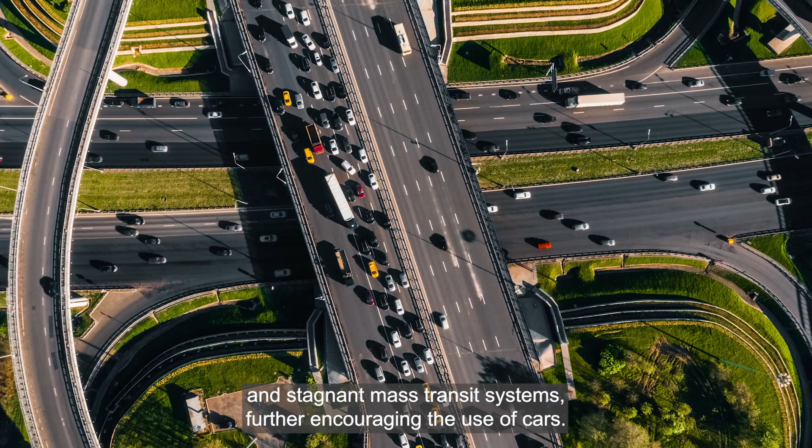Driving habits in the United States are constantly changing. Suburban sprawl boomed starting in the 1950s with the expansion of the U.S. interstate highway system and the effects of the GI Bill. Rates of private vehicle ownership rose sharply, with cheap gas and stagnant mass transit systems further encouraging the use of cars.

However, more recent expansion of mass transit systems, a clearer understanding of the environmental impacts of cars, and new alternatives to daily driving, such as rideshare apps, bicycle share companies, and the prevalence of remote work, has led Americans to slowly reduce their dependence on cars. This car dependence has influenced development policy over the decades, driving the construction of ever more elaborate parking systems.

Today, there are over 2 billion parking spaces in the United States, more than enough to cover the entire surface of Connecticut, an estimated 3 to 8 parking spaces for every car in the United States. A 2022 driving habits survey by U.S. News & World Report found that nearly half of all drivers have reduced the amount they drive compared with before the pandemic, and over 60% have reduced their driving because of higher gas prices.

The youngest generation of drivers is obtaining licenses at a slower rate than any generation before them, trading personal cars for metro passes and rideshare apps. Municipalities have noticed these shifts and responded by beginning to eliminate parking minimums for new development in transit-oriented communities. In 2017, the city of Buffalo, New York was the first in the United States to abandon parking minimums. Since then, other cities have followed their lead, from Santa Monica, California, to Hartford, Connecticut.

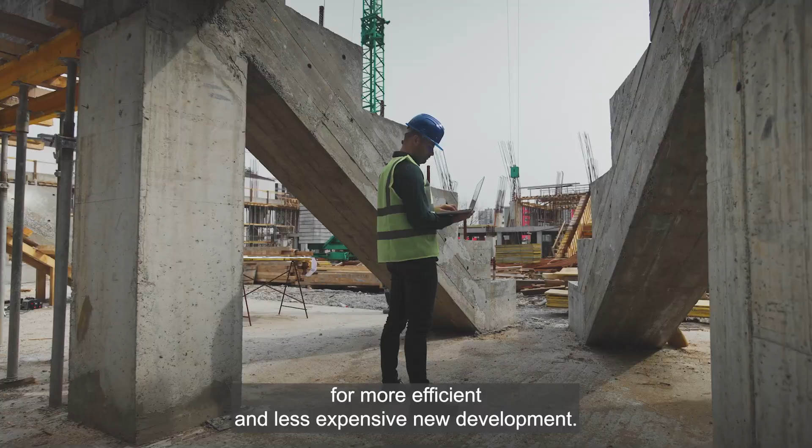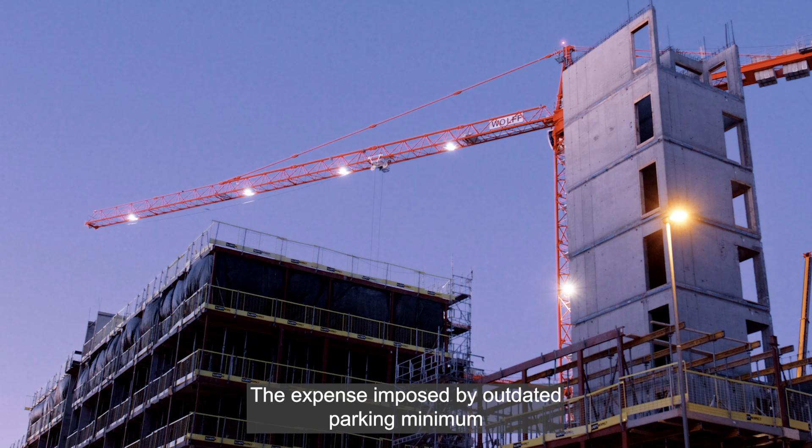These shifts in driving habits expose the latent possibility for more efficient and less expensive new development. According to construction engineering firm WGI, building a new parking structure costs nearly $28,000 per space. The expense imposed by outdated parking minimum requirements can severely hinder new residential development, further exacerbating ongoing housing shortages. Eliminating previously built parking structures will have its own negative impact. The waste generated by demolition, not to mention the environmental impact of new construction, makes adaptive reuse an attractive option.

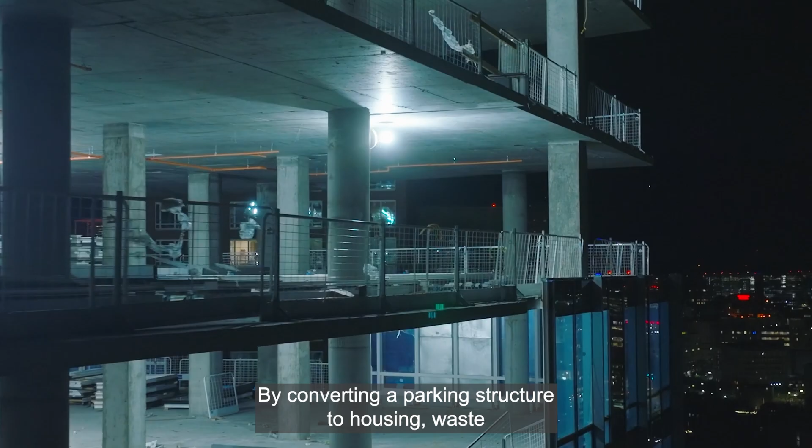By converting a parking structure to housing, waste is minimized and embodied carbon reduced. Starting with an existing structure and eliminating the demolition phase altogether also reduces the construction timeline. A few years ago, KTGY's Research and Development Studio proposed a design concept for repurposing underutilized parking structures for housing.

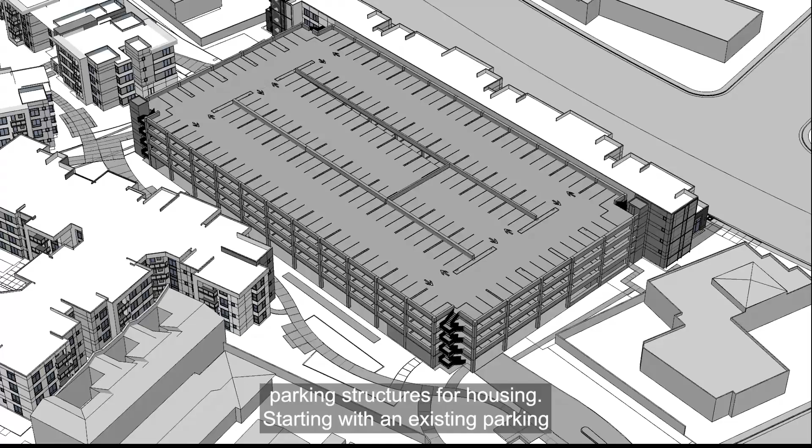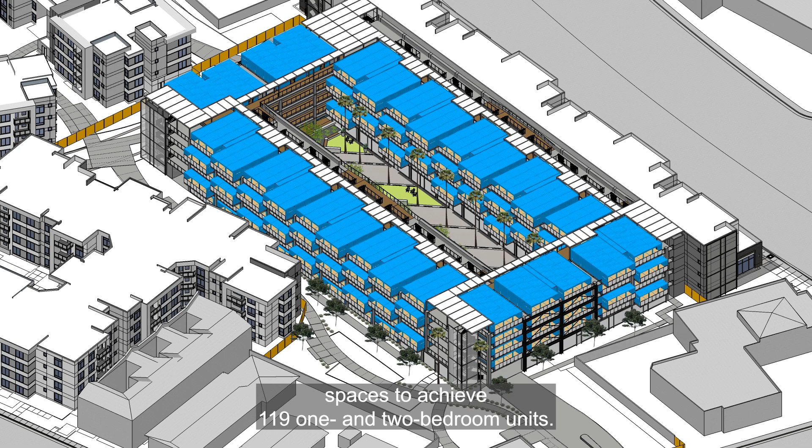Starting with an existing parking structure from a completed wrap building in San Diego, California, we reimagined the donut-shaped standalone structure, inserting factory-built steel modules to create a new housing concept, Park House. The proposed Park House design repurposed 1,091 parking spaces to achieve 119 one- and two-bedroom units. Developing the Park House concept taught us some important things.

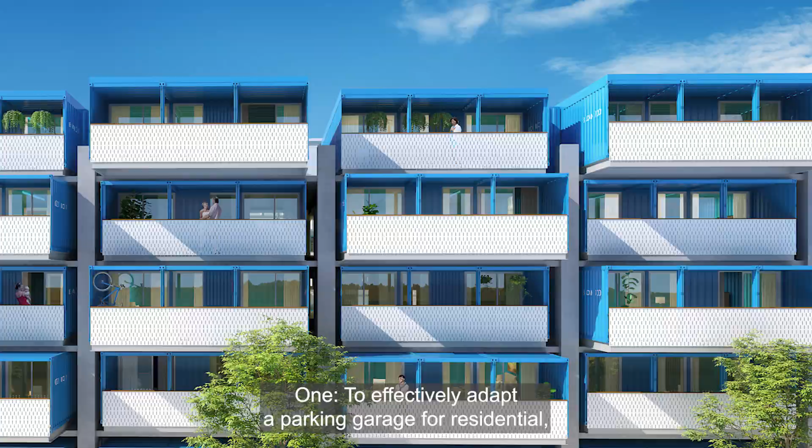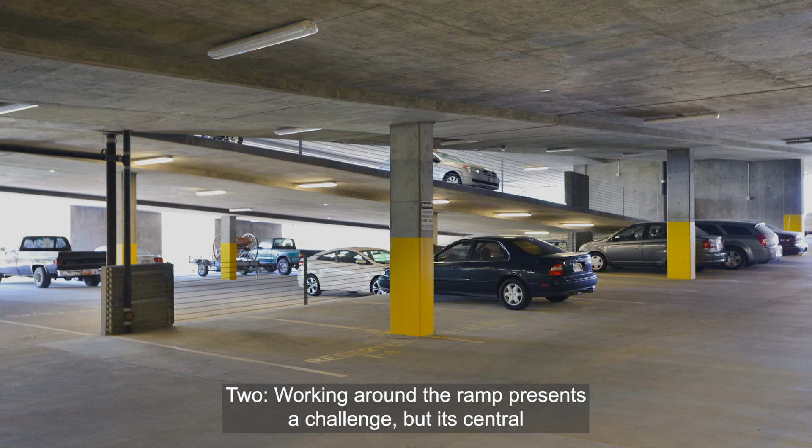1. To effectively adapt a parking garage for residential, large portions of the parking structure must be flat or very close to flat. 2. Working around the ramp presents a challenge, but its central location makes it a natural fit for the community courtyard space. 3. Distance between floors should be maximized, allowing for at least 7 feet of clear height within the units.

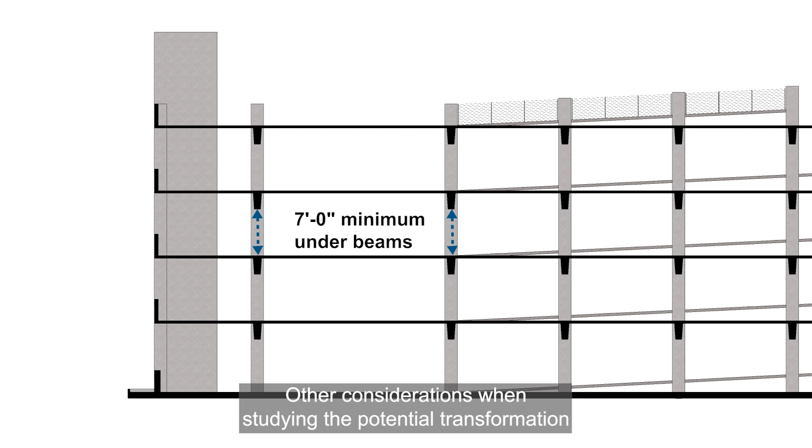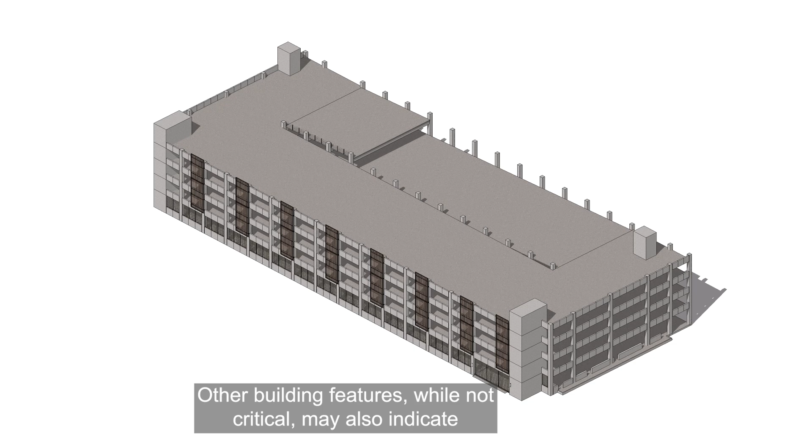Other considerations when studying the potential transformation of a pre-existing parking structure include intrusion into interior clearance height, structural capacity, total building square footage, stair and elevator locations, site access points, and proximity to adjacent buildings. Other building features, while not critical, may also indicate more suitable candidates for conversion. A wide column grid allows larger, unobstructed unit areas. It's also important to note that local building height limits may restrict the ability to construct units on the top level of the parking structure.

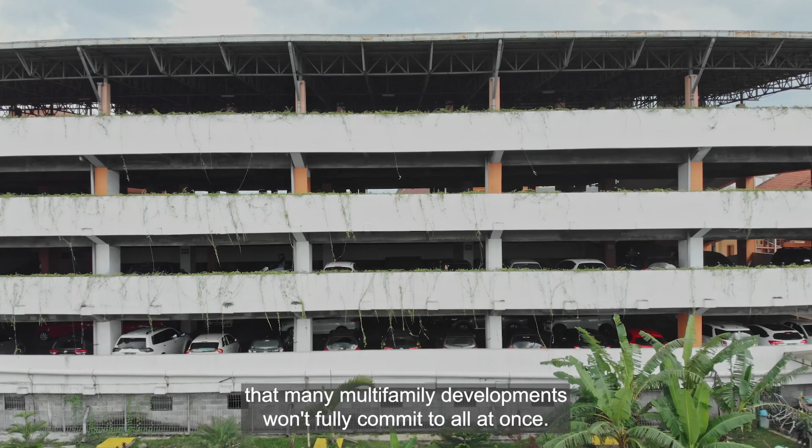We also learned that transforming an entire parking structure to residential is a dramatic undertaking, and one that many multifamily developments won't fully commit to all at once. Consider a parking structure where just half the floors are consistently empty or only a single floor. Adapting the entire structure would be unreasonable.

A smaller incremental transformation, however, provides flexibility and reduced overhead, enabling building owners to respond to the needs of residents while adding value to underutilized spaces, all within existing capacity. Taking what we've learned from our first concept, we've now developed an incremental approach to repurposing parking structures.

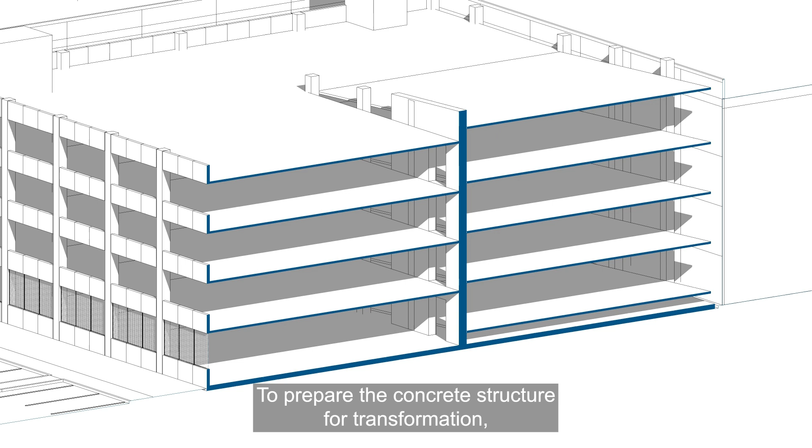Parkhouse 2.0. Using the 561-space parking structure from a KTGY wrap building located in San Jose, California, as a case study, the research and development studio reimagined how a parking structure could be modified incrementally, creating a phased approach to this adaptive reuse solution.

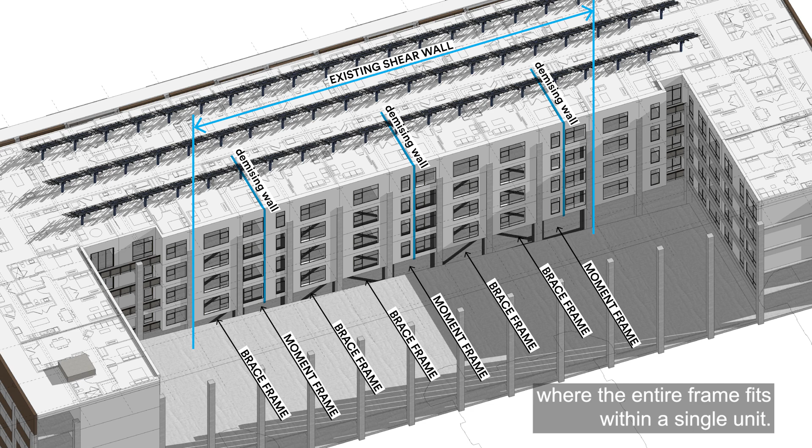To prepare the concrete structure for transformation, first a short extension of the highest portion of the ramp is removed, and the shear wall adjacent to the ramp is replaced with brace frames and moment frames. This allows for the future addition of units in those areas. Looking ahead to where the future units will be located, brace frames are used in places where the entire frame fits within a single unit. Where the frame crosses between two adjacent units, a moment frame is used instead.

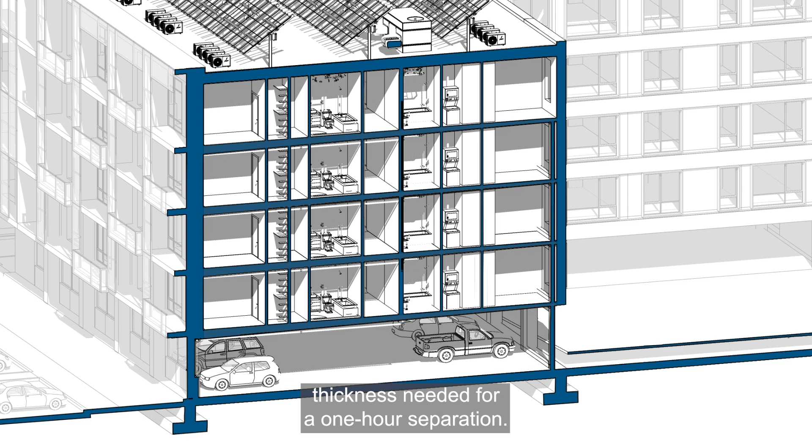To maintain a 1-hour separation between the different occupancy types of parking and residential during each phase of the transformation, a topping slab is added to the parking plate, maintaining a level floor surface and creating the concrete thickness needed for a 1-hour separation. While the topping slab is necessary to achieve building code requirements, it's important to maintain as much height clearance as possible between the levels of concrete.

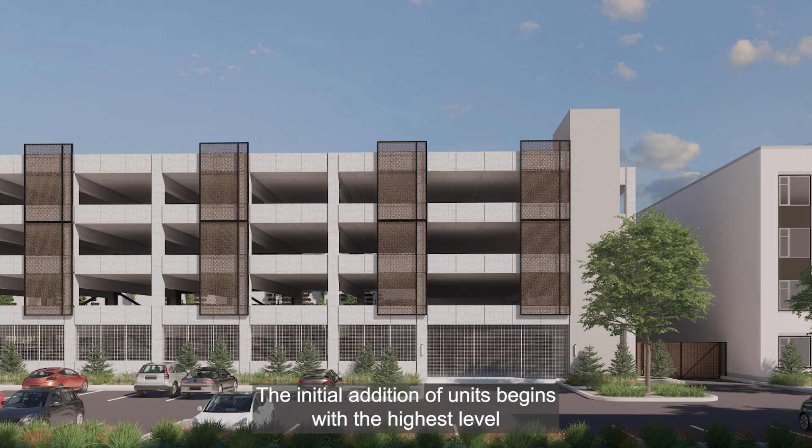The initial addition of units begins with the highest level of the garage. 22 units are added in Phase 1, repurposing 138 parking spaces. A sloped amenity ramp and utility chases running vertically along the exterior of the building are also added during the first phase of construction.

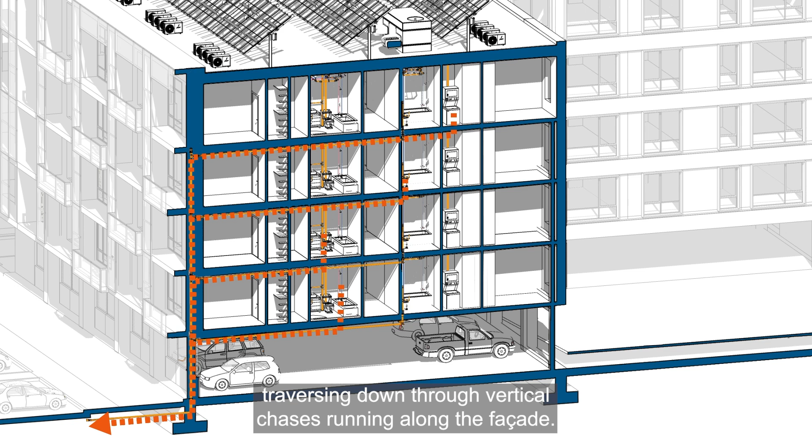Pipes servicing the units run toward the exterior of the building, traversing down through vertical chases running along the facade. All plumbing and utilities run within the existing structural bays to avoid routing beneath deep transfer beams and compromising clear heights within the units. Heat pump refrigerant lines also run within these vertical chases to route from rooftop heat pumps to individual units.

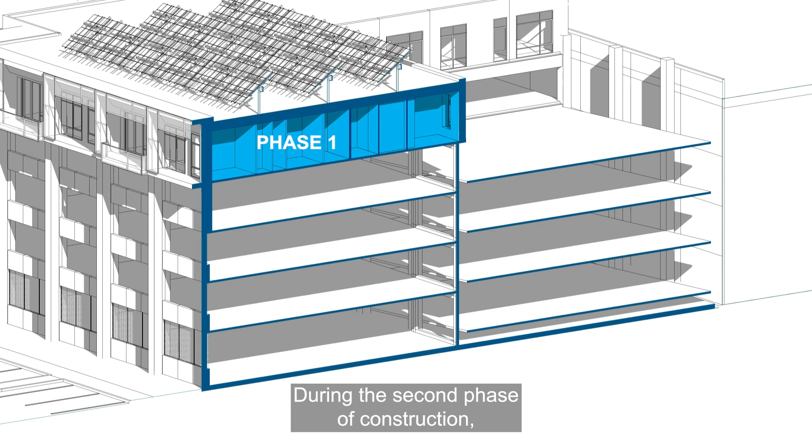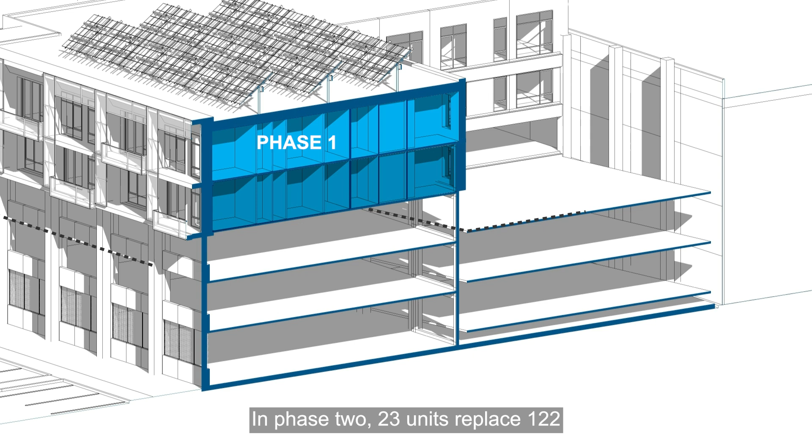During the second phase of construction, the top level of the ramp is removed, forming an amenity courtyard on the ramp below. Modular decking components are relocated from the upper ramp to the level below, creating flat areas for amenity programming along the winding sloped walkway of the pre-existing ramp. In Phase 2, 23 units replace 122 parking spaces on the second to highest level of the structure.

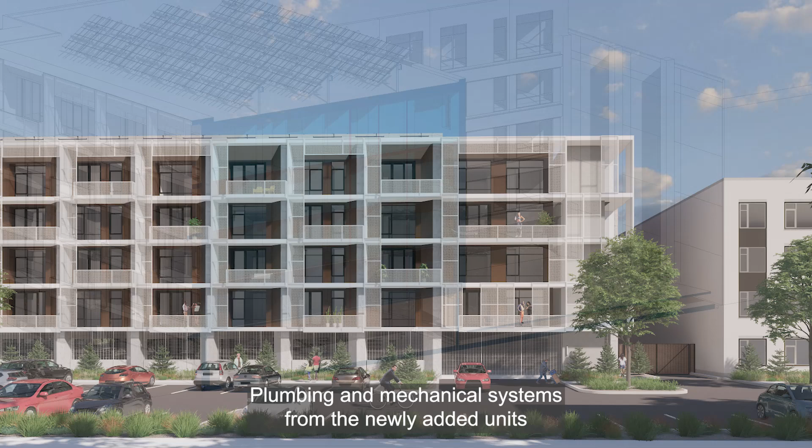Subsequent phases follow a similar pattern. A level of ramp is removed, shifting the amenity space down. Units are inserted on the next highest level, replacing that level of parking spaces. Plumbing and mechanical systems from the newly added units join with the vertical chases placed during the first phase of construction.

To minimize the impact of construction on residents occupying earlier phases, a panelized facade easily plugs into the existing concrete structure, attaching to exterior concrete columns. This modular system can be installed in a less intrusive and more timely manner than site-built construction.

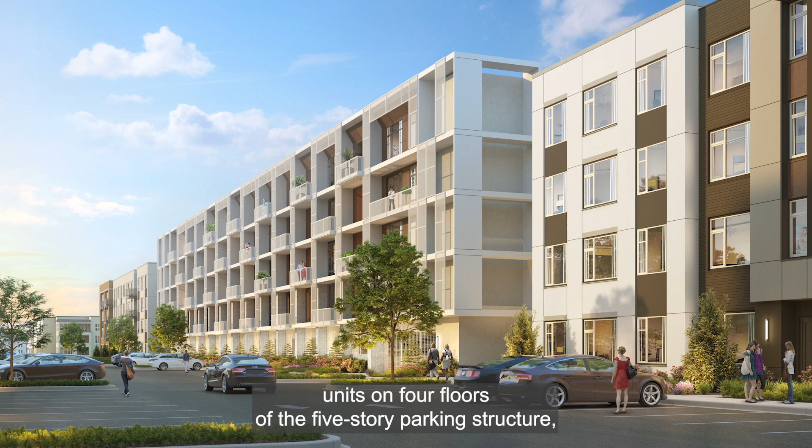With all 4 phases of the transformation complete, the Parkhouse 2.0 design proposes 91 units on 4 floors of the 5-story parking structure, with 59 parking spaces remaining at the ground level.

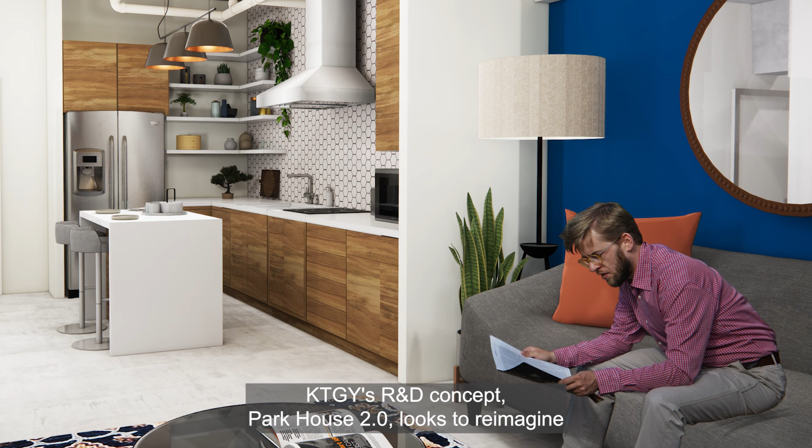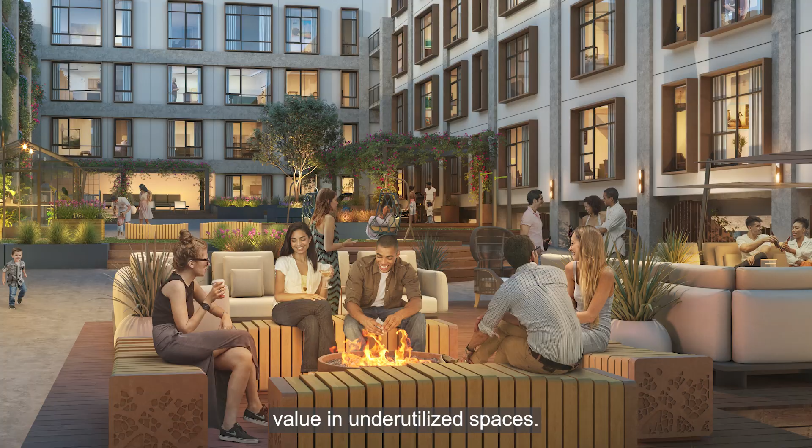KTGY's R&D concept, Park House 2.0, looks to reimagine parking structures in a phased and incremental way, allowing building owners to evolve their developments to respond to the changing needs of their residents, while capturing value in underutilized spaces. It's difficult to predict how Americans will adapt their driving needs in the future, but an incremental approach makes us quicker to adapt with it.